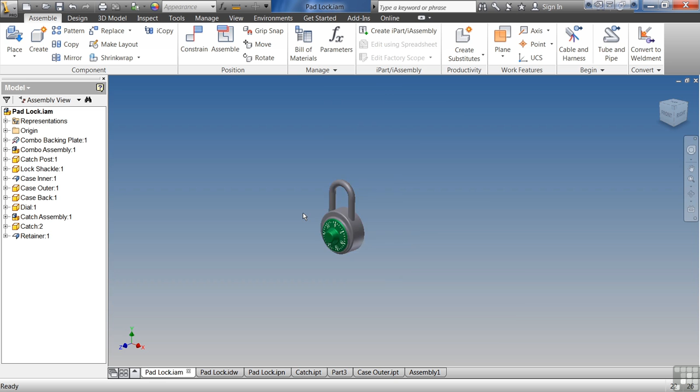Let's get started. The first and easiest way to move around in Inventor is your mouse. Everybody's familiar with the mouse, and probably with the zoom wheel from Microsoft. If you roll your mouse wheel in or out, your model will move either away from you or towards you. At the same time, if you hold down on your mouse wheel, it will actually pan around.

Certain mice, you may have to change the mouse wheel functionality to represent the middle button instead of some of the more advanced zooming functions. You can set it by program so that it will only change in Inventor, and all the options will still work. What that means is whenever you click down on the zoom wheel, it becomes pan. That goes back to the old 3-button mouse days that Microsoft used to have.

The next options you have for view manipulation are the view manipulation toolbars. We'll start from the bottom and work our way up.

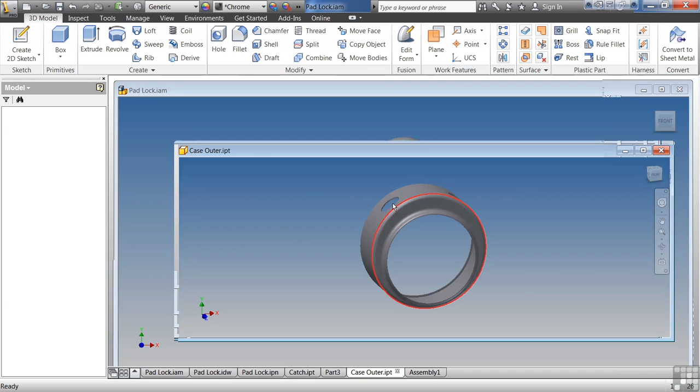We have the Look At tool. If you click on this and click on the flat surface of an object, Inventor will zoom to that surface. If you click on a different surface, it'll zoom to that surface instead. If I find a part that has sketches, I can click on Look At and it'll actually zoom to that sketch. It's a very powerful tool.

Anytime you're sketching, you want to ensure that you're perpendicular to the surface you're sketching on. Even the slightest angle can modify the way your sketch will turn out.

The next option we have is the orbit. Underneath orbit, there are two different options. You have your standard orbit, which allows us to rotate around. If you grab it on the outside, it'll allow you to rotate it. If you grab it on the end, it'll allow you to rotate it in that axis, making it a lot easier to manipulate.

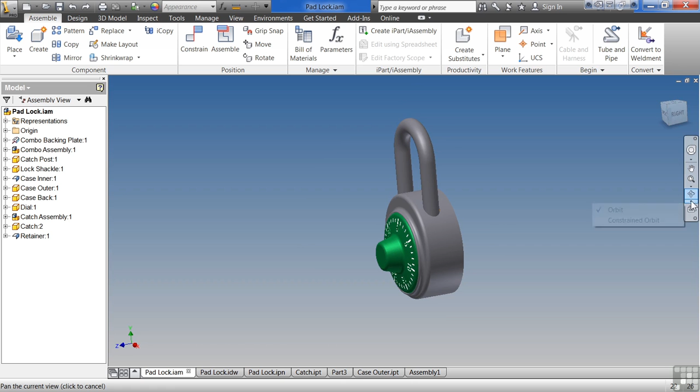Or we have the secondary option, which is constrained orbit. What that does is lock you down and keep you from accidentally rotating and spinning it at the same time. It gives you a little more control.

The next options we have are our zoom options. You have zoom window, probably the only thing I use on occasion. Then zoom all, which is the one I use the most. I use my mouse for everything else.

You have pan, though I rarely use this option because I have my middle button set on my mouse wheel, allowing me to instantly pan without clicking a button. Anything I can do to save a button click means I save time and make my job easier.

Up from there, we have the navigation wheels. Autodesk introduced these a couple years ago, and they're in Inventor, AutoCAD, Revit, all the Autodesk products. These allow you to zoom, orbit, pan, look up, look down. You can do walks, center on the object, and a lot of different options for view manipulation.

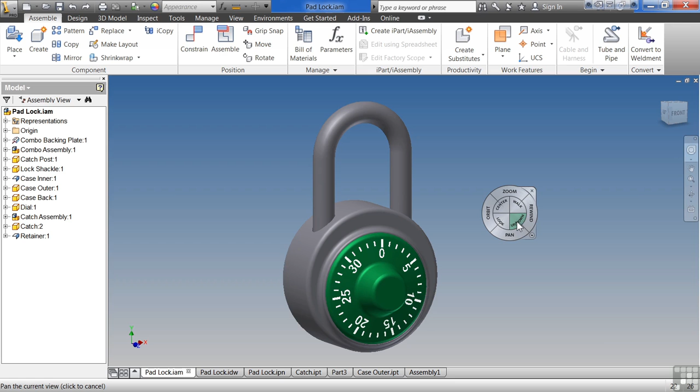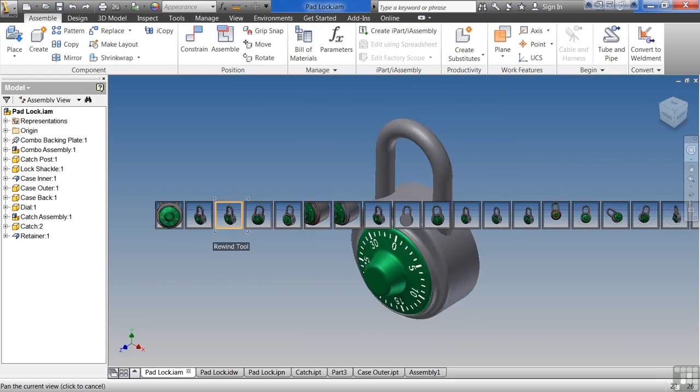The best thing about the steering wheel is you click on rewind and can actually see your zooms and go back in time to where you were. It doesn't modify what you've actually done since then. If you've gone in and modified your geometry, rewinding does nothing but change your view back to where you were in that moment in time. It's a very powerful tool, especially important if you have a big object or assembly you're inside of and you're zooming around trying to get to a different part.

Last thing with view manipulation, over to the right, is the view cube. This was literally made for Inventor. The view cube is the most powerful way to move around. This gives you control over whether you're looking at the front, the top, or the back. If a part's upside down, this is how you fix it—take and rotate it.

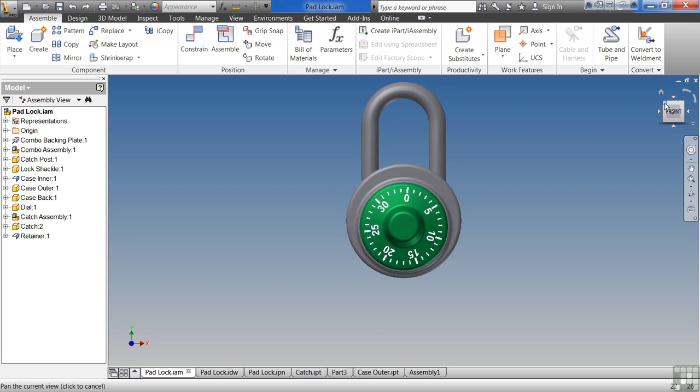I can look at an object at an angle by clicking on the edge of the view cube. It'll zoom me around to whatever edge I'm looking at. See, I can look at different angles.

The other important thing about the view cube is it helps control shadows and reflections. If you turn on your shadows and reflections for modeling, you can get a better understanding of what something's doing.

It's based on what is front and what is top. If I right click on this and say set current view as top, notice now my reflection's at the back and so is my shadow. Come back here, right click, and say view as front - my shadow and my reflection are on bottom.

I can adjust the perspective view by right clicking on the view cube and say perspective with ortho faces. I can adjust home at a distance or fit to view.

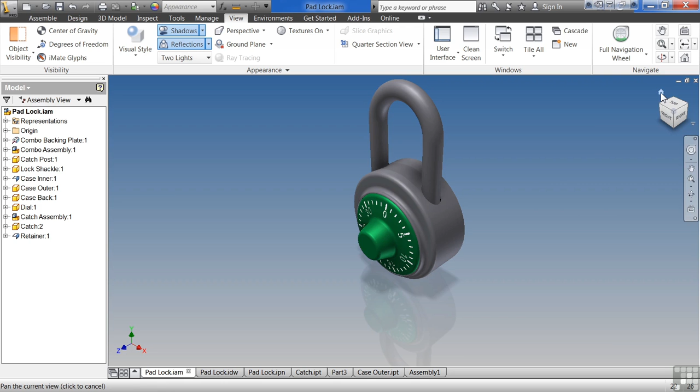What that means is if I come up here and click on this little house, it'll always go back to that, doesn't matter where I click over here. I modify my view, click home, and it goes back to that original view that I had. I can reset the front. I have options.

If I come into the options for the view cube, I can see all in 3D view, only in the current view. I can decide what is my on-screen positioning. I can actually change the size of the view cube, make it smaller or larger. I can adjust the opacity of it. I can change whether the default is on the XY or the XZ or ZY, whatever I may need to do. I can turn on my compass.

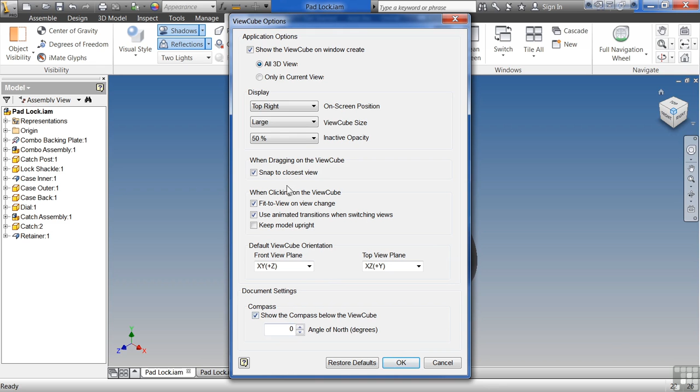One of the things I really like is turning on the compass. Hit OK. What that allows me to do is rotate my part around by using this compass. The compass changes with the views, of course.

If I set that as front, see that it faces south. Front always faces south, back always faces north. You can see that just grabbing the view cube and twisting it around is an easy way to manipulate it.

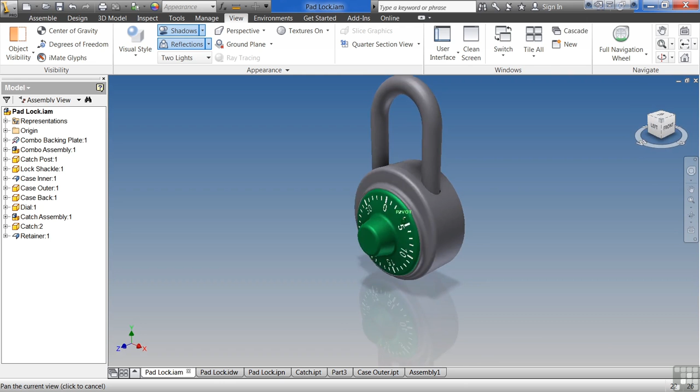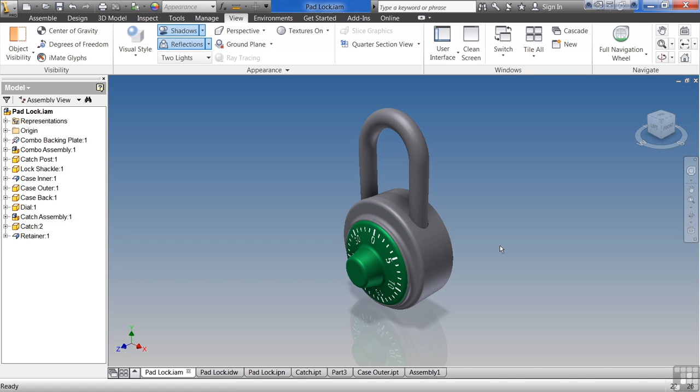Another option you have for view manipulation in Inventor is the 3D controller. I know these cost money, bosses don't like to spend money, but you can go to 3D Connexion and get one for less than $100. Go out to eBay and pick one up - they are the essential Inventor accessory. I always encourage people to buy a good mouse and a 3D controller. I can't imagine not being able to rotate around without my controller.

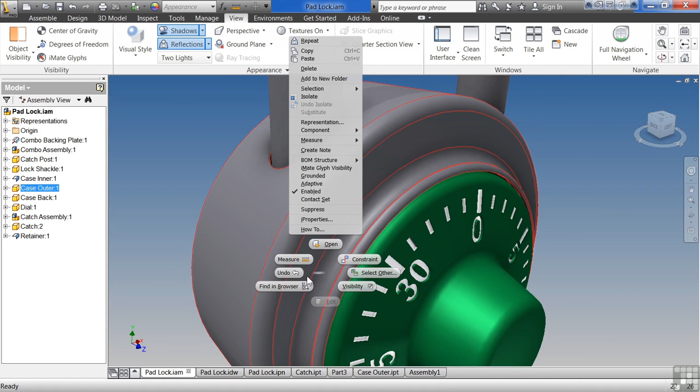This allows me to free up my mouse to be working on an object at the same time I'm rotating. The view cube is nice for looking perpendicular to an object or if I need to look at a certain view. But if I'm in here working on something and I need to zoom in or look at something very closely while modifying it at the same time, I can be modifying with my mouse and zooming in with my 3D controller.

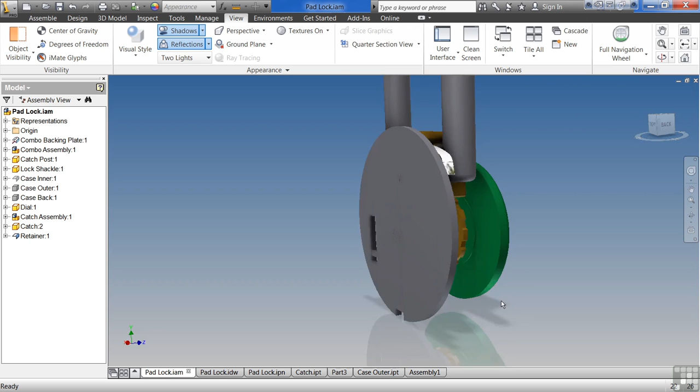It's a very, very powerful tool, and it's a good way to increase your speed without spending a lot of money. It's a very affordable device. You can spend $400 or $500 on them, but I highly encourage you to look at eBay and pick one up for $50 and try it out. You'll understand that moving around in Inventor is much easier with the 3D controller.

If you're not fortunate enough to have one though, between the view cube and the navigation bar over here to the right, and then using your mouse, view manipulation is very, very easy inside of Inventor.